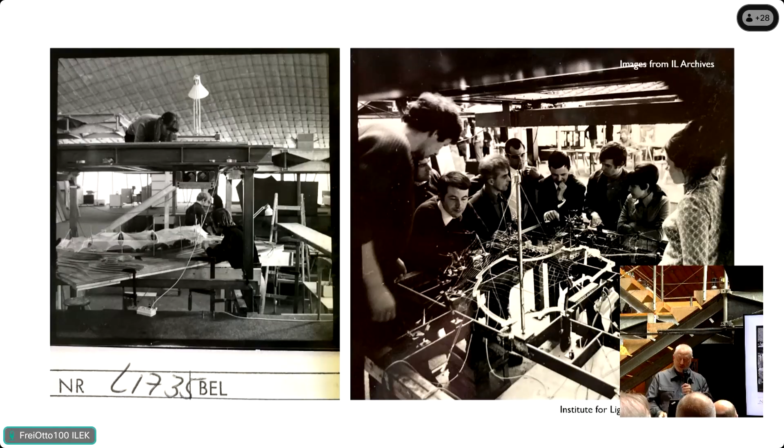And it struck me, as somebody who dabbles in construction history, to look backwards. Those who know Otto's first work after his thesis, the Tensile Structures book, was published in '62. This work was developed from 1954 to 1960, and was a collection of experiments and drawings and models and calculations. And there's some implicit humanitarian work involved with many of these pneumatic structures. If you've seen the book, this is page after page of hundreds of drawings. It's an incredible range of work, and it's incredibly inspiring.

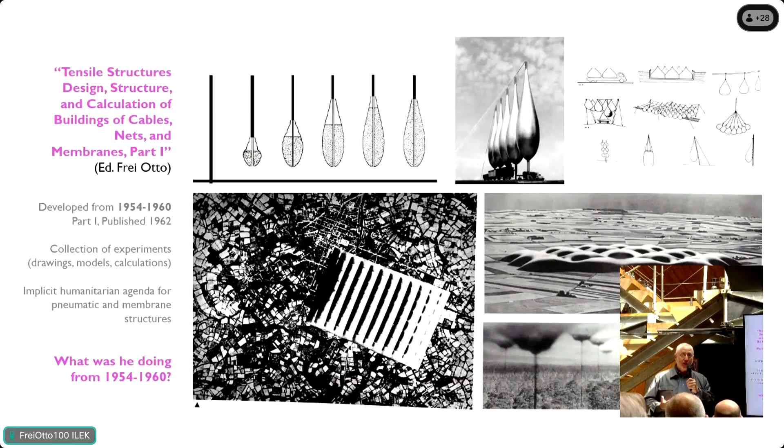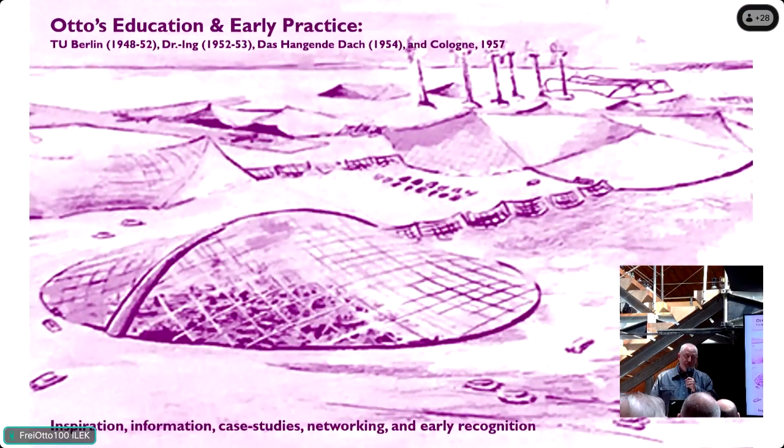And I just thought, what was he doing between 1954 and 1960? This is a very relevant question, right? What was happening in this time? History gives us the opportunity to look backwards. Those of you who are educators know that your work has probably been influenced by how you learned. And those of you who learned from Otto probably do that in your own practices. So this first part talks about his learning, both at the TU Berlin, then his thesis, and then his early work.

Many thanks to our friends at Karlsruhe for access to his sketchbooks as a student. So these are Otto's drawings. They're absolutely incredible. The biggest takeaway is that this method of developing sketches was based on case study. How do you know how to make different roof assemblies? You look at it, you draw it. One after another, one after another. Page after page of these beautifully drawn, incredibly rendered drawings.

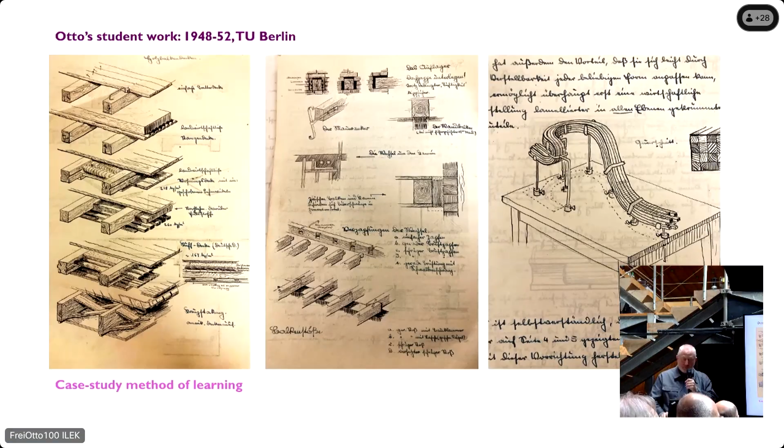And when you get to the higher level of his education, you see this amazing sketch on the right, a proposal for a bent wood structure. All of it was curved, and he designed the framework to hold it in place, and he's writing about why it would work and how it would work. This, to me, explains so much: case study, case study, case study, in order to innovate. That's pedagogy. There it is, thinking, making, right? It's inherent in his work. He's a resourceful person, of course, as those who know him know.

And so at 25 years old, he, of course, gets a study abroad scholarship at the University of Virginia. And he writes letters to, I mean, look at this list. The Saarinens, Mies van der Rohe, Mendelsohn, Wright, the Eameses. Says, hey, I'm coming to America. Can I stop by and see you? And they're all like, sure.

And the idea of doing this today is remarkable to me, to think that he was able to do this. And so this is his agenda for his trip. And these are sketches that he made of, of course, the Lakeshore apartments from Mies van der Rohe and the sketches inside of it. But I'm also highlighting here somebody that's not usually on the list that you read. And that's Fred Severud.

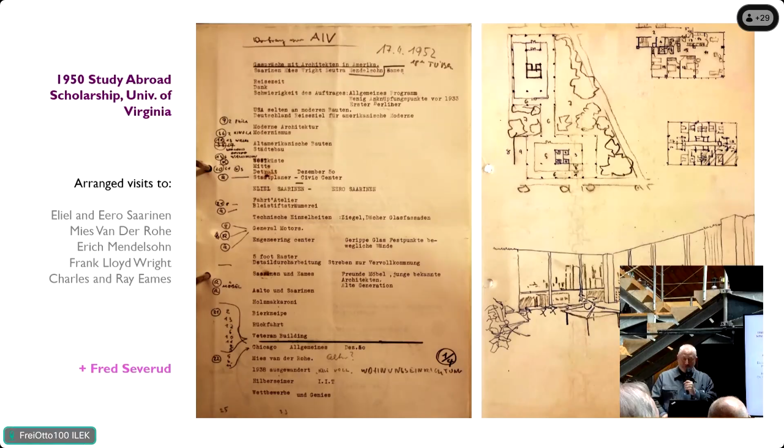Who is Fred Severud? Well, he's a celebrated visionary American structural engineer. He wrote about connections between structural form and nature. If you don't know Fred Severud, I would say he's a kindred spirit to Otto in many, many ways, and in fact was the first mentor. So look at the article that Fred Severud wrote here. It's called Turtles and Walnuts, Morning Glories and Grass,

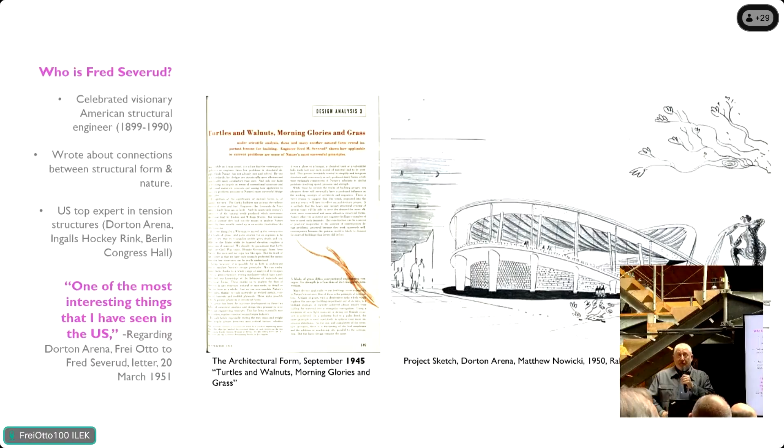1945. This very much aligns with what we've seen from the previous lectures, this idea of where does the connection between structural form and materials come from? From nature, the inspiration for it. So because he met with the Saarinens, who knew Severud and said, you should stop by and see Fred Severud. And he did. And so he saw this sketch, actually a model of Matthew Nowicki's work at the Dorton Arena. You'll notice this from, of course, his thesis.

He then started correspondence with Severud, said, that model was one of the most interesting things I've seen in the US. Imagine meeting with Frank Lloyd Wright and thinking that this was it, right? I love that. So his case study learning continues. He writes to Severud that he's compiling everything that's ever been done in the field of the hanging roof. He tells him what his thesis is going to be. He asks for more information.

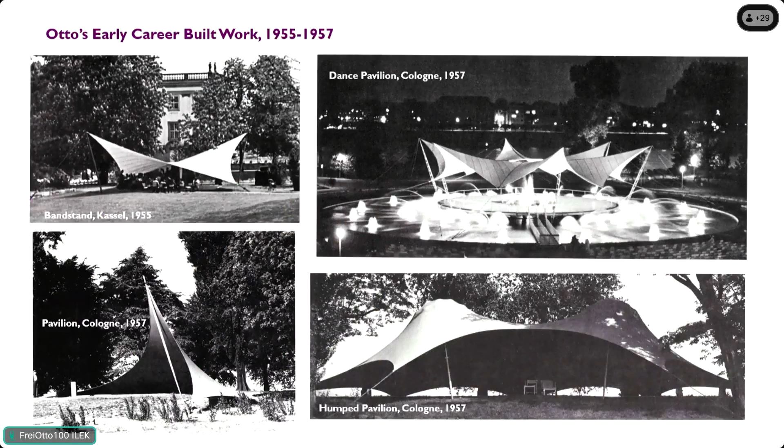He then, of course, features the Dorton Arena on the cover of his thesis. Writes to Severud, his long-term correspondent, and says, you gave me the inspiration to write this book. I'll always be grateful to you for that. So 1954 is where we are now. Of course, his early work, 1955 to 57, incredibly inspirational work, groundbreaking work, work that wasn't really being done anywhere. It's important to contextualize the dates here.

Severud then writes an article for Progressive Architecture magazine about Frei Otto, introduces Frei to the publication world around the world, and includes these sketches that you can see. And in it he says, I'd like to introduce Frei Otto to everybody. And then at the end, he says, well, we're certain to hear more from him again in this field.

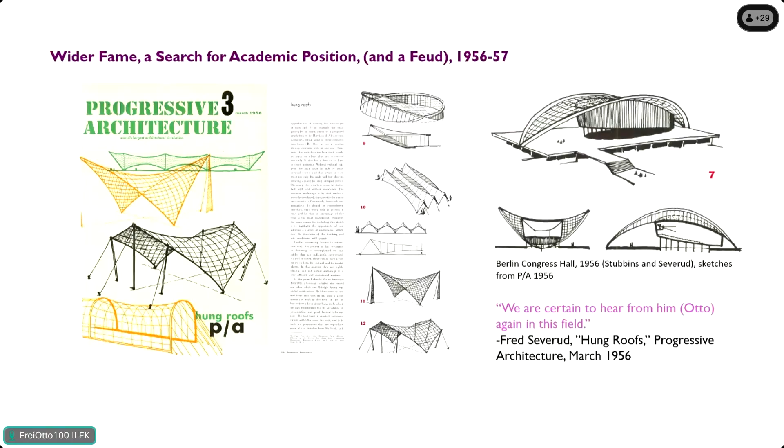I'm also including a sketch from the Berlin Congress Hall, 1956, that Severud worked on with Hugh Stubbins. There was a feud that ensued because of Otto's critique of the engineering of this. And those who know the story know it became pretty contentious pretty quickly. The contention of this feud made it so that Otto's search for a teaching position became more complicated.

He had written to Professor Catalano at NC State, North Carolina State, looking for a teaching position. And after a couple years, expresses his concern that he wasn't going to be able to find one. People wanted him to teach in engineering. He wanted to teach in architecture. He wanted to do research, didn't just want to teach. These are hard positions to fill, right?

So what I love about this quote from the letter, again, to Severud, is that thankfully, he did not give up looking for teaching. But he was going to, and then talks, of course, about the work that he's doing in Berlin for the IL. Thankfully, he was offered a position to teach. His first studio he ever taught was at Washington University, which is in St. Louis, Missouri, in the US, 1958.

This is an interesting distinction I want to make here. It was a 16-week design studio. So it's an immersive, heavy credit studio where generally in the US, of course, we have design projects, you're supposed to develop them. He was hired by Dean Passonneau. Dean Passonneau was also an architect and an engineer. So he understood this overlap between the two ideas.

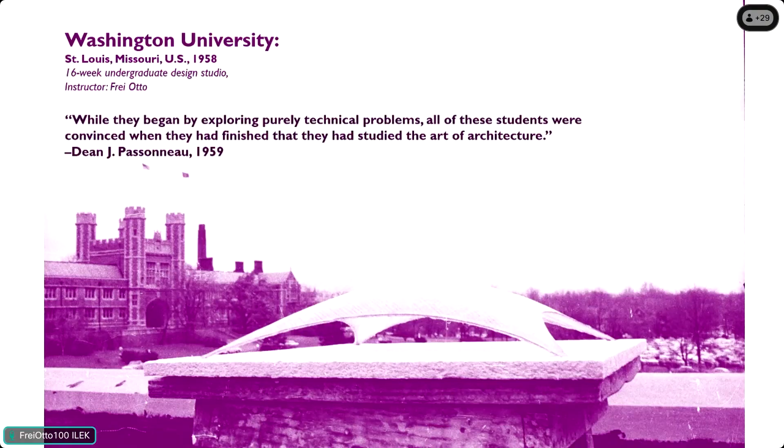Quick context about American education. It was obsessed with practice-oriented, functional trade school preparation. Codes, code review, program review. It was all meant to teach people how to just do what practice was going to be.

Now, in the mid-1950s, there were some rumblings with this. There were some changes that were starting to emerge from this, but also Frei Otto recognized that there were other internationally renowned designers, of course, like Gropius and Mies and Wachsmann and Fuller, who also were teaching in the US, and they had these research and design positions as well.

So Fuller, if you don't know, his experiments at the Black Mountain College with these great model making things, this was radical, crazy radical to US education, did not continue. And then there's a group called the Texas Rangers at the University of Texas at Austin, which decided that what US education really needed was more formative model making experiences.

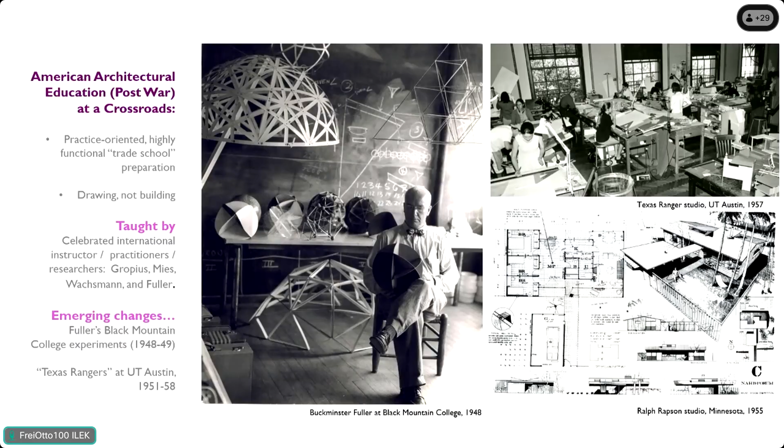And so within this context, I present to you the work that Otto did in his first lecture. So he did lots of form finding, science and nature things. He relies on case study. There was no program, there was no design. It was all focused on discovery. So there were direct sensory experiences. He had people make things, emphasis on representation and communication. So I'm going to show you slides from the work.

What I love about this is, again, this connection between thinking and making and the models that were produced. Some look familiar, right? Yeah, so some look very familiar. Some are quite novel. Some are extraordinary. 1958. I'm sure you're looking at things here and saying, we've seen these before, or we've seen these later. And that, in fact, is exactly what's happened. There's only about 16 people in this entire class. And they built this work, of course, through case study.

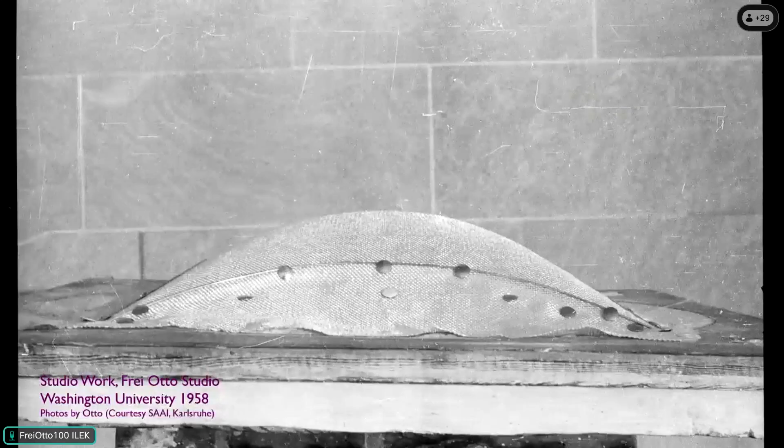So here's an idea for a project. Please build it. They would build it. They would analyze it, right? And then this idea of learning how to make came from the confidence of case study. Experimentation came from case study.

If you compare some of the work that you just saw with work that Otto had just done, we see direct, like, please rebuild the pavilion from Cologne. Got it, right? Please build the two up, two down from Kassel, or the dance pavilion. And then they would. And so then the students would build it and be able to photograph it.

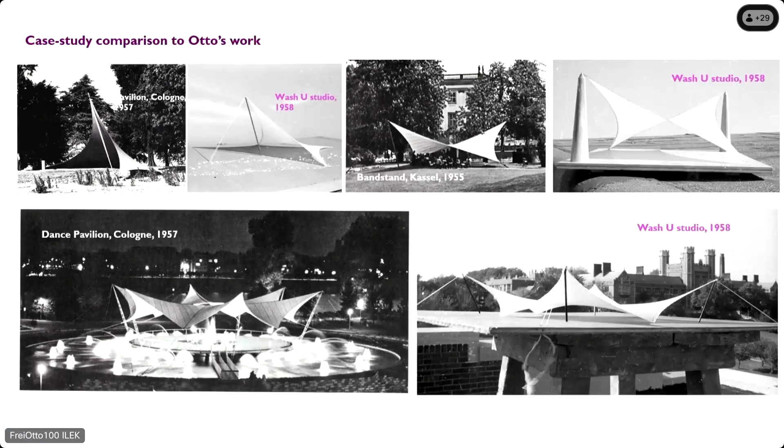There's other work that was done there that became inspiring or upcycled through Otto's work, which I find just absolutely fascinating. This experiment that I think led directly to the form of the aviary, the dock cover in Bremen, and of course then the German pavilion study model.

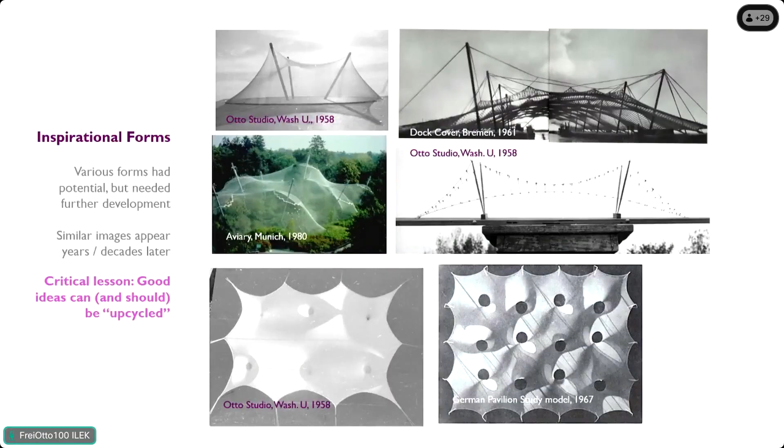Here's the thing, it wasn't just about case study. Those of you who know the work know that it's not just about imagination, it's about how can we make sure that there's a technical component to it. So the model making always has measurement models. Measurement model number 1, the hanging shell.

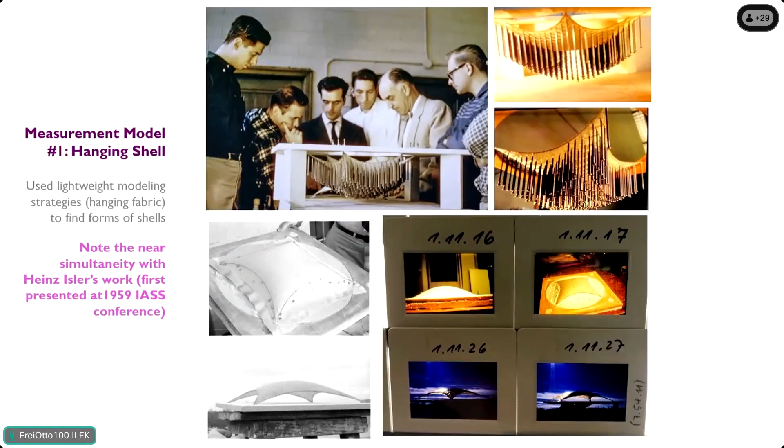The hanging shell is quite interesting and quite unique, and I think precedes Isler's work by a year. Those of you who know Isler's work know he first presented the hanging shell in '59, and here Otto is doing this in his coursework. The measurement model here again of the two high, two low. The idea of it's not just about making it, but being able to measure it, test it.

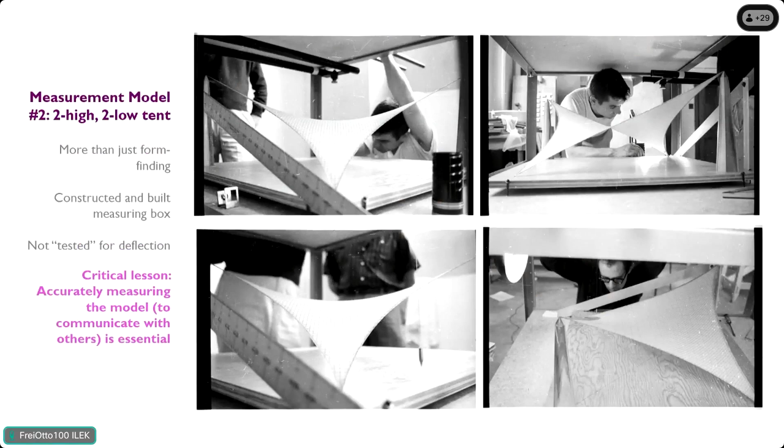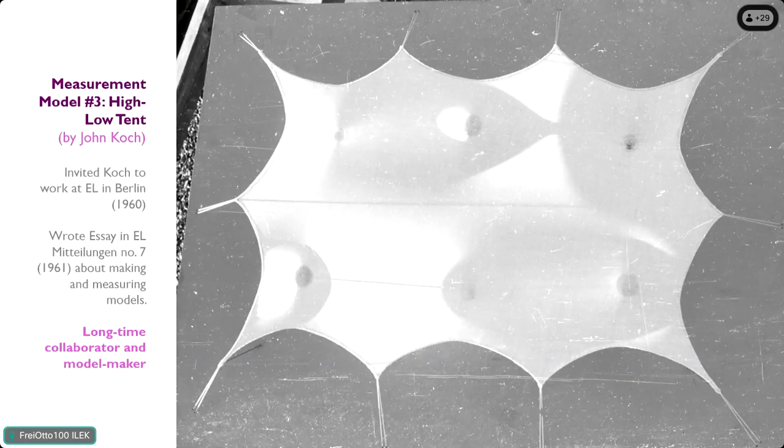And then one of the students, John Koch, with this incredibly interesting project, was then invited or came to Berlin and wrote an essay in the Mitteilungen, the Information 61, about how to make measurement models of this particular model. So there's this enduring legacy of that. And Koch's work actually was then continued in '59, and this was the work that was shown in some of the tensile structures.

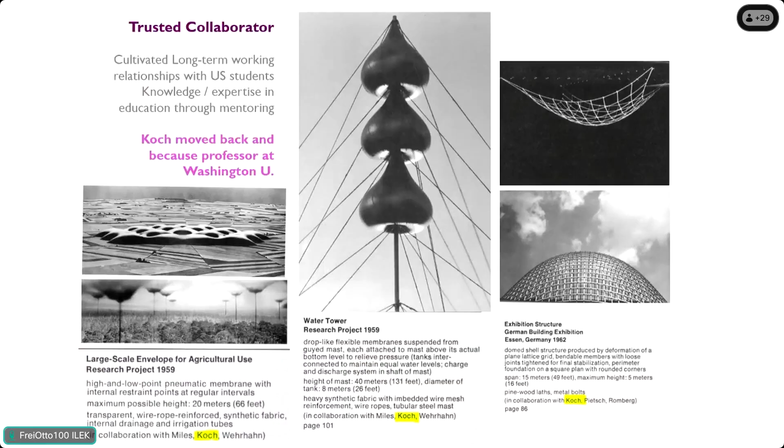It was an incredibly formative teaching experience. I contend it must have been his most formative, in fact. I want to get to his next work at Yale in 1960. This was a 6-week seminar. That's much shorter. And this was a design-based project for design of assembly and exhibition.

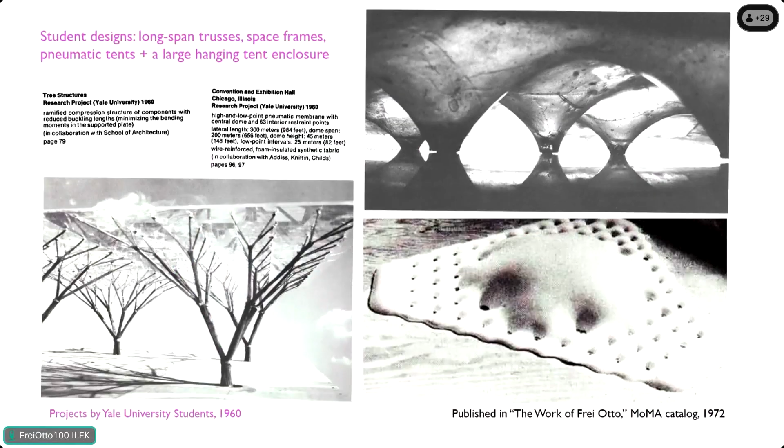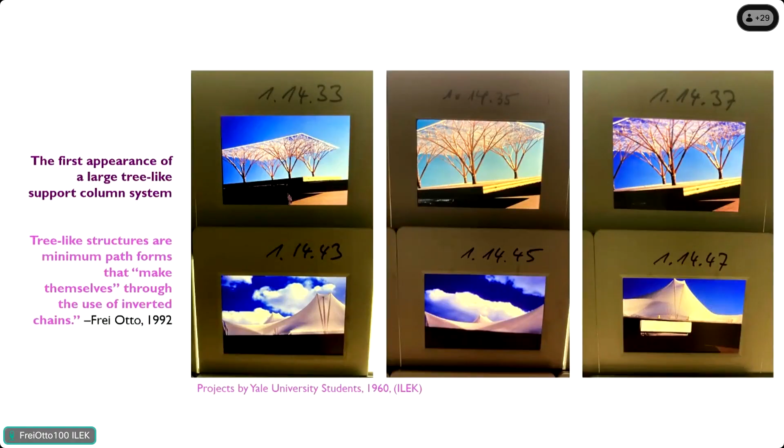This student design work was space frames, tents, large hanging tent enclosure. All of these things were in fact featured in the MoMA catalog from 1972 as work of Frei Otto. It was the first appearance of the large tree-like support system. And of course, we know from his work how he was obsessed with the idea of self-forming structures, including the tent-like tree structures.

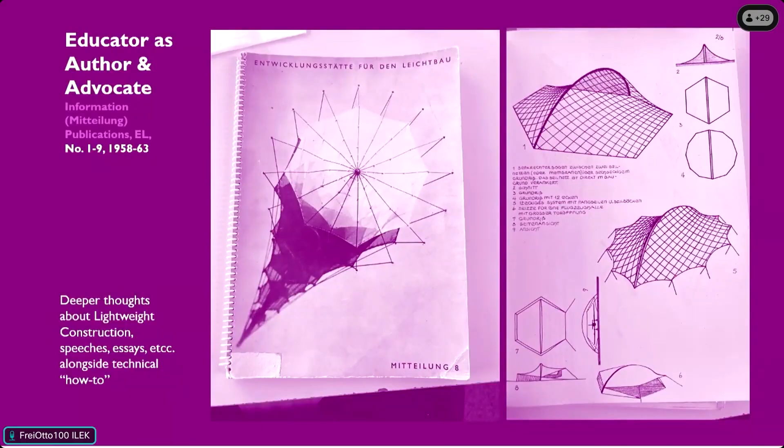His work continued, and this is an important part. He wasn't just an educator, but he's then writing. He's advocating for these things, and he's writing about this work technically. This was one of the great finds through the archives, this sketch of the different types of visual classification of structural typologies.

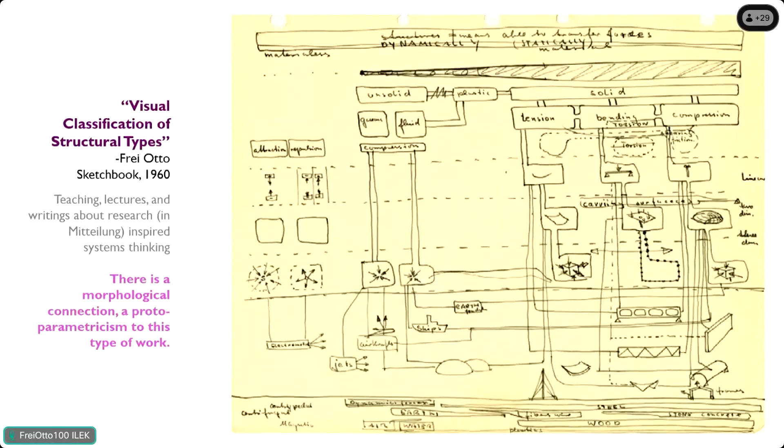As he's teaching and as he's writing, he then makes this diagram to try to explain: how do I explain to students how different form and forces are related? And so he's making this diagram of it, and I contend that there's a sort of morphological and proto-parametricism involved with this, of trying to do that. He formalizes this eventually and includes this in his documentation.

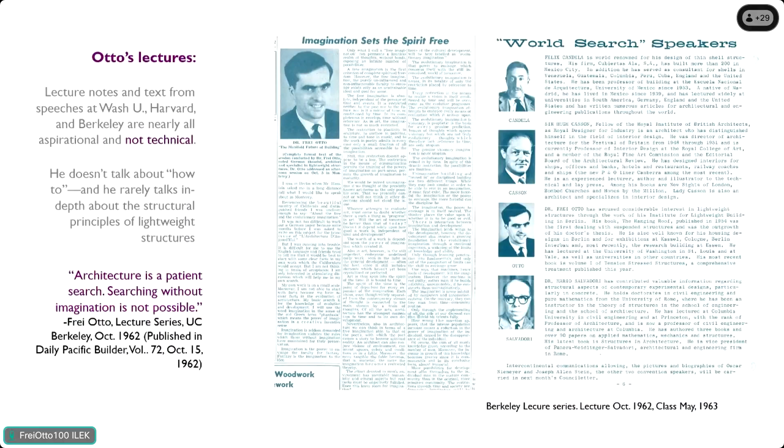His lectures were light on technical components and were heavy on inspiration. They really settled on why should we do this, not how do we do it. And I think it's quite interesting that the expectations people would have would be, I'm going to learn about how to make a lightweight structure, and instead he'd talk to you about why it's important to build with lightweight construction.

1962, his last teaching appointment then at UC Berkeley, was a 4-week graduate seminar. It's shorter now, right, by even more. It's a 4-week. This is remarkable for a couple things. There was a 40-page book that was published by the students. This book was actually, I contend, illustrated by Ed Allen. If those of you know the great American author Ed Allen, he was one of the students in this studio, as was Larry Medlin. So there's a 40-page book where Otto's technical lessons are illustrated here.

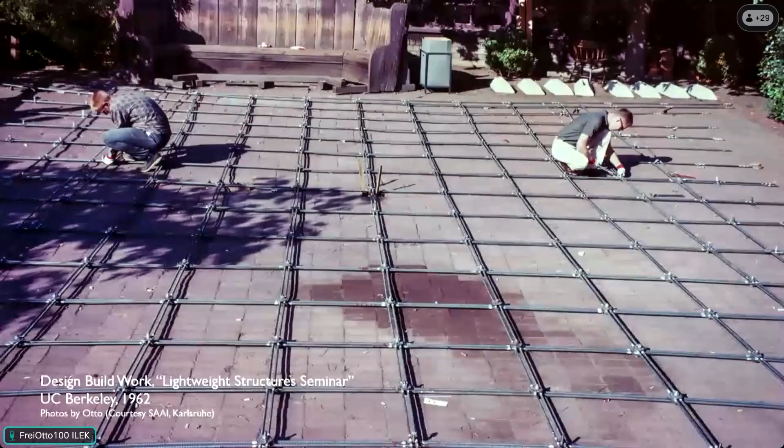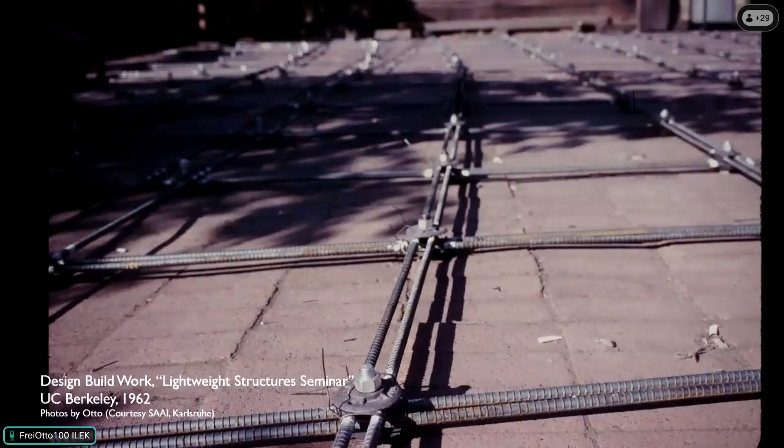And so they did a step-by-step of the hanging chain model. And here I'll show you some slides of what they did. Imagine this in 4 weeks, educators among us. They're laying out the grid shell, tying it together, getting ready to lift it up. I love the idea that, I mean, the details are pretty nice. They're pretty heavy. I think their reflections say that the rebar was a little heavy.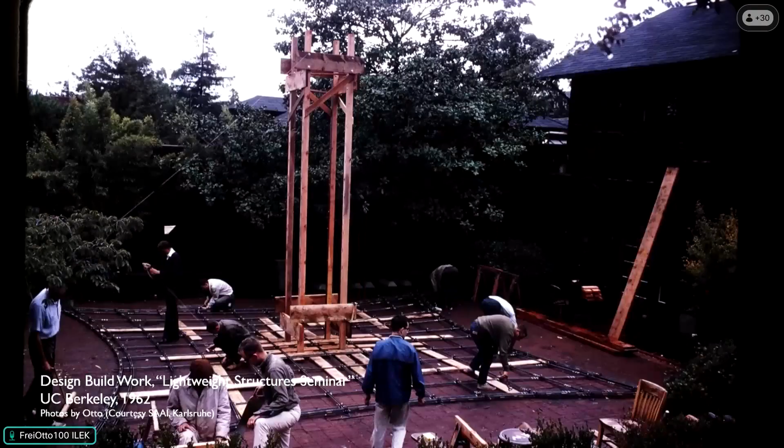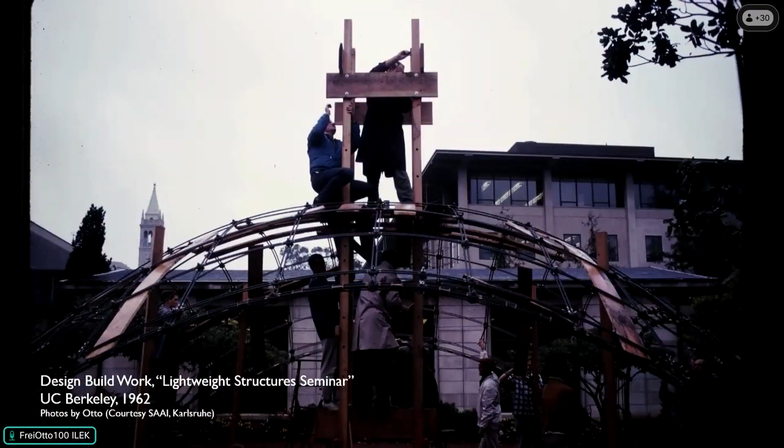I think the idea of building this with no crane in the middle of it and just getting people out there and lifting it in place, not a hard hat in sight. And look at that, he's straddling around it, lifting the whole thing up. They got it up to a certain height, but it was too heavy, and it started to bow. It wasn't working. So they had to brace it temporarily. They had to redo the structure. They had it come down and had it come right back up.

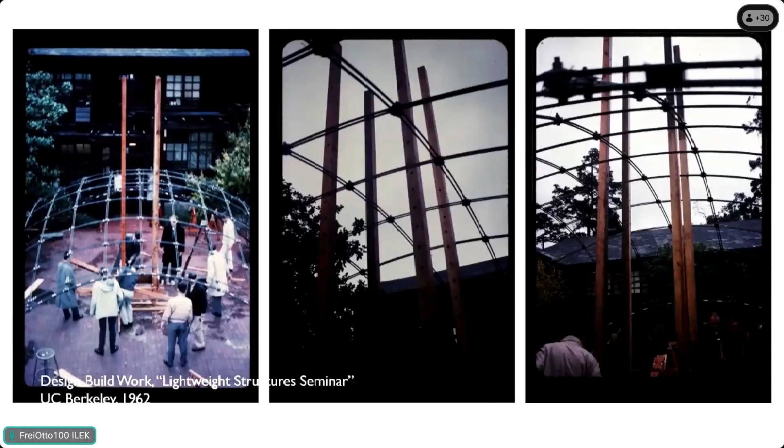And eventually, this was corresponding with the International Association for Shells and Spatial Structures conference, where this finished design work in the courtyard, which we'll see here in just a second, was then part of the exhibition. Just an incredible finished product. Quite remarkable, in fact, I would say, for 4 weeks worth of work.

I want to get to the last part here, which has to do with how this became where we are now. He was reflecting on his teaching, and he was tired of the short-term teaching appointments. This is very hard for his work. He's developing his work, and these are hard things to be able to do quite quickly. And so was it worth it? So he desired something that was more pure research.